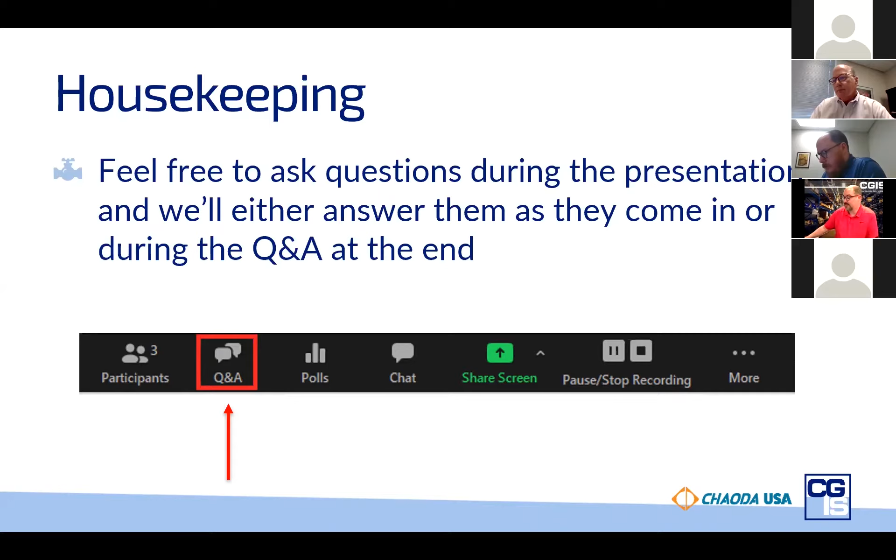So moving on to about CGIS. We trace our roots back to 1965. CGIS was officially founded in 1980 as we took over the ownership of a valve division from our sister company that was founded in 1965. And throughout the many years of our experience, we've developed various streamlines in our business to support our customer base throughout the world. Primarily based in Canada, but we have operations around the world.

We've developed engineered solutions primarily to focus on severe service, critical applications for every industry that runs process as their main part of their business. Streamlined solutions for day-to-day utility needs in the world of valves. Obviously project solutions and service to be able to support our partners, whether that's on the end user level or the manufacturing level.

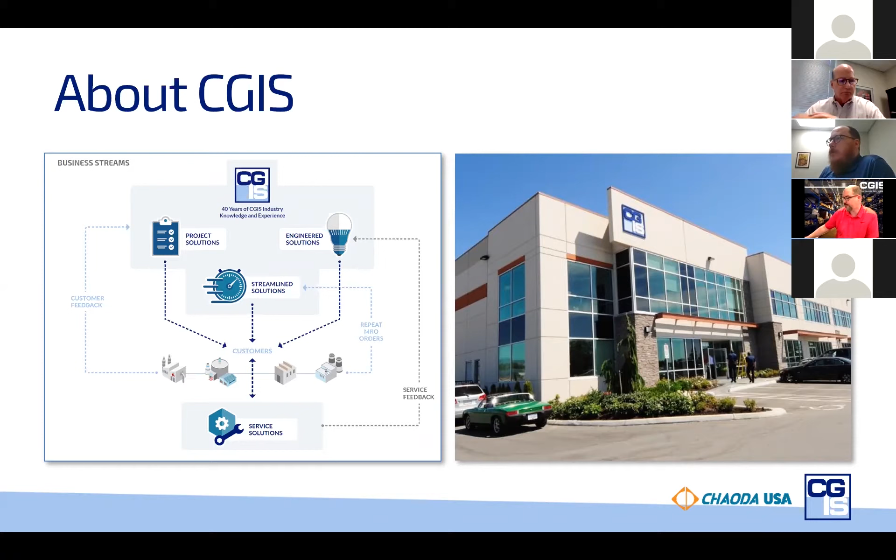Chaoda, privately held since 1984. They are focused on the infrastructure and technical development. They own the entire supply chain process right from the foundry to manufacturing, to boxing up and shipping it to our customers. 1.5 million square feet in manufacturing area. And of note, they have a complete North American team on quality control for the North American marketplace.

So our presenters today are Doug Jones, Richard Harmon, and myself, Kevin Niebergall. Doug Jones has 38 years of experience with a focus on severe service. He's the Vice President of Sales and Marketing with Chaoda USA and serves on API committees and task forces, including API 641 for fugitive emissions.

Richard Harmon is also based out of Houston, Texas. He's the Director of Marketing at Chaoda, and he has 10 plus years in the industry in various sales, marketing, product management roles. Myself, I have 26 plus years of experience in primarily Western Canada, focusing on oil and gas, pulp and paper, and LNG or cryogenic services in the oil and gas marketplace. I'm based in Prince George, BC, Canada.

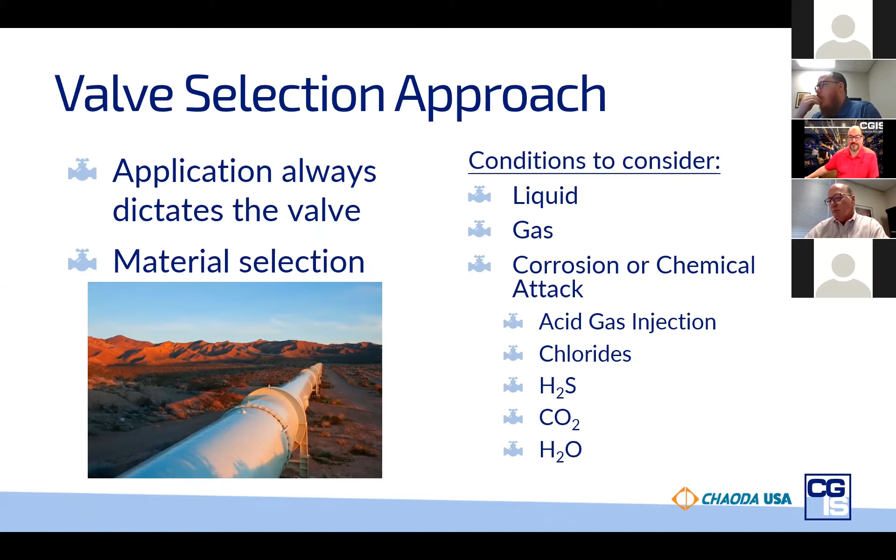So as part of my portion of the presentation, I'm going to talk about some of the applications that we'll commonly find in the oil and gas industry or in pipelines, to talk about some of the different designs or setups, and then allow Richard and Doug to dive into the technical differences in the types of valves. So commonly we'll find Trunnion mounted ball valves, or DBB and DIB, on line breaks to protect the piping system or the environment. It's monitoring the upstream, downstream pressure conditions, is a fully closed loop, self-contained system that will react based on the pressure conditions of the piping system in the event of a break or rupture of a piping system.

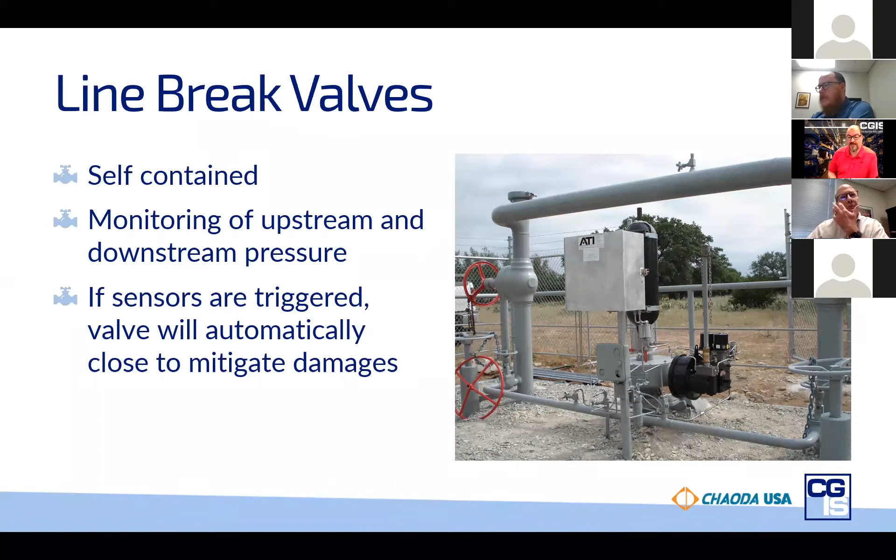So we have a mixture, normally we'll see mostly manual valves here. The automated valves are primarily part of the pipeline. So you can see that we have a manifold, receiving barrel that's connecting to the main line.

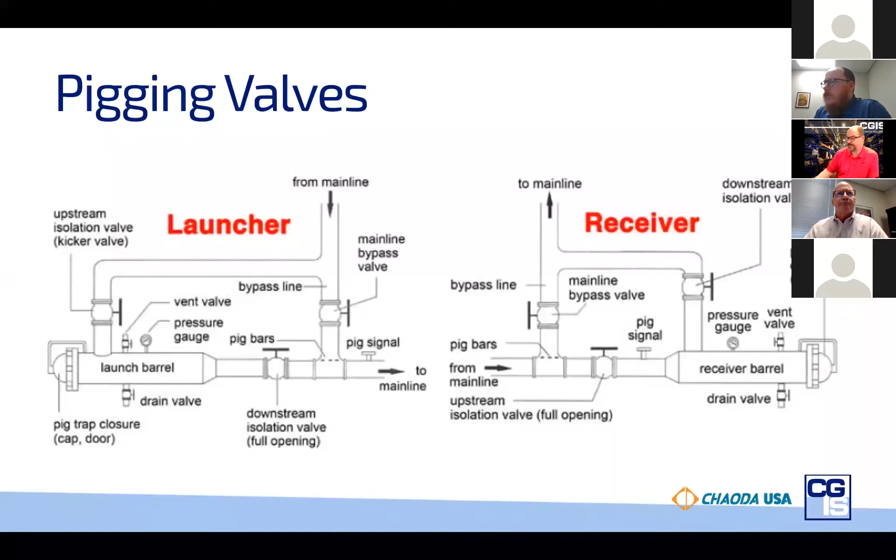So what's the purpose of pigging? Cleaning to remove any liquid or sediment or anything that has developed within the piping system that could potentially lead to corrosion or is affecting the volume of flow that's able to go through the pipeline.

The integrity has become extremely important over the last number of years. Introduction of smart pigs to measure wall thickness, identify any cracks, and corrosion issues that may be occurring within the piping system so that we can do a far better job of maintaining the safety of that pipeline.

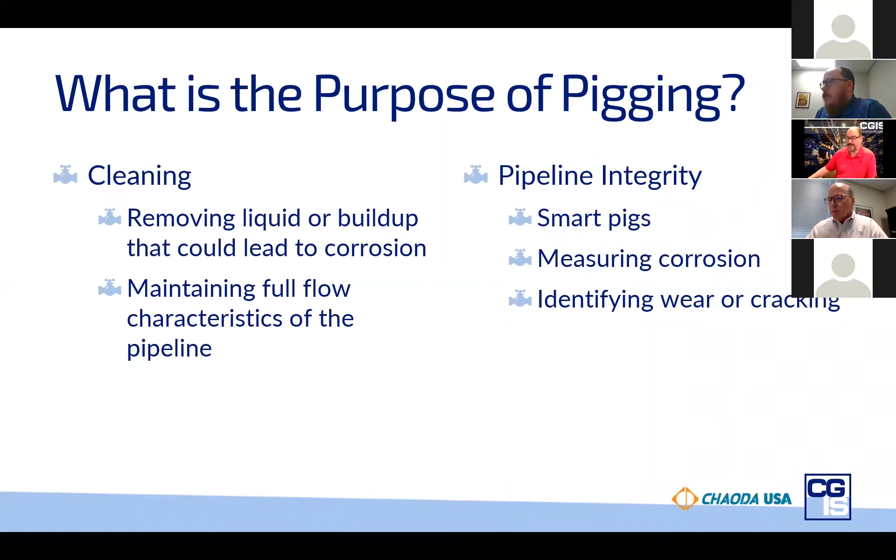Lines are running up from that valve so that we're able to inject sealants or lubricants to assist the valve in its performance. And then that is buried below ground so that we're below the freezing point so that we can safely operate.

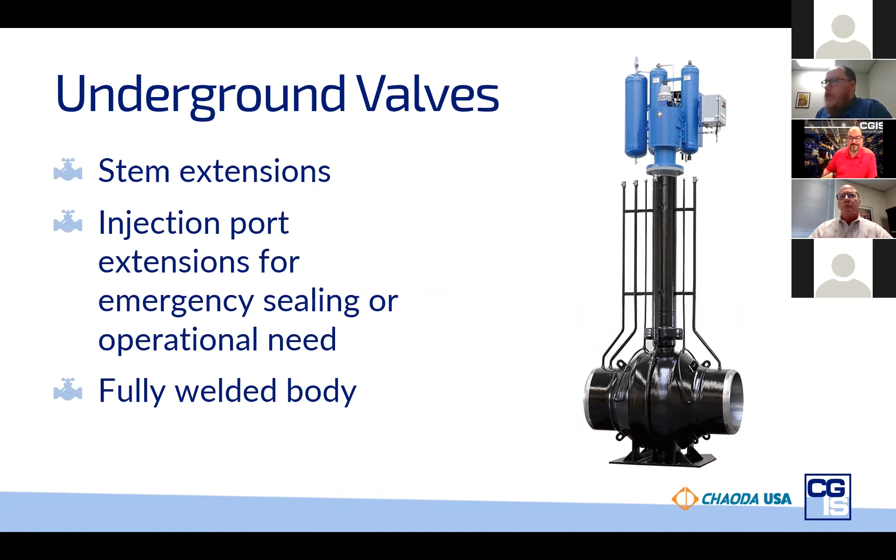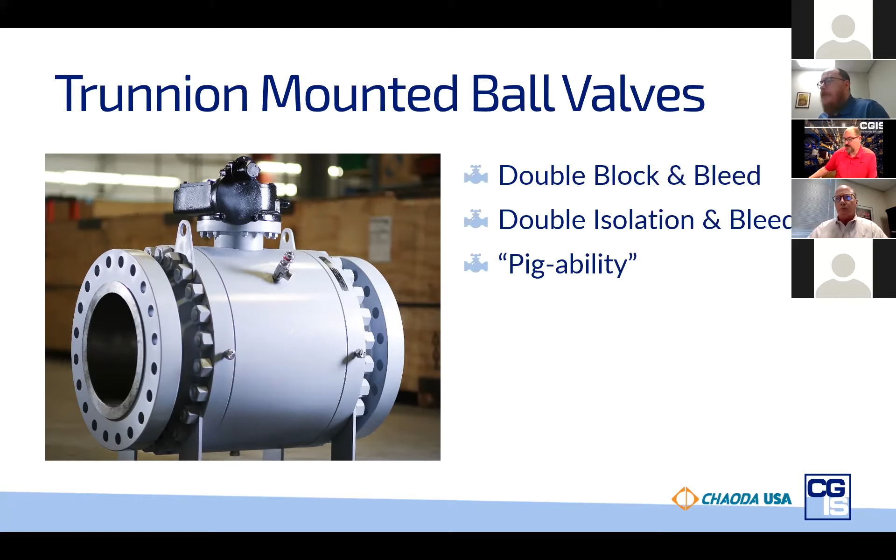Just from what Kevin introduced, I wanted to take a little bit of time and talk about pipeline isolation and how it interacts with valves. It's a topic that gets talked about a lot, and there is some confusion, not due to anybody's fault, but because there's a lot of competing and conflicting terminologies and philosophies about pipeline isolation. So I hope that we could run through some of these definitions, scenarios and design principles with respect to valves, so that everyone can have a better understanding of the different definitions, and then have an idea of what type of questions you need to ask to get a good understanding of how a valve performs in pipeline isolation. If we can accomplish that in this webinar, we'll be doing great.

With respect to pipeline isolation, obviously it's a critical facet of safety in pipeline work. For a pipeline that's been constructed and now needs to be maintained, being able to reliably and safely isolate sections of that pipeline so that you can work on them or clean them or do whatever you need to do with them—being able to do that safely is absolutely key.

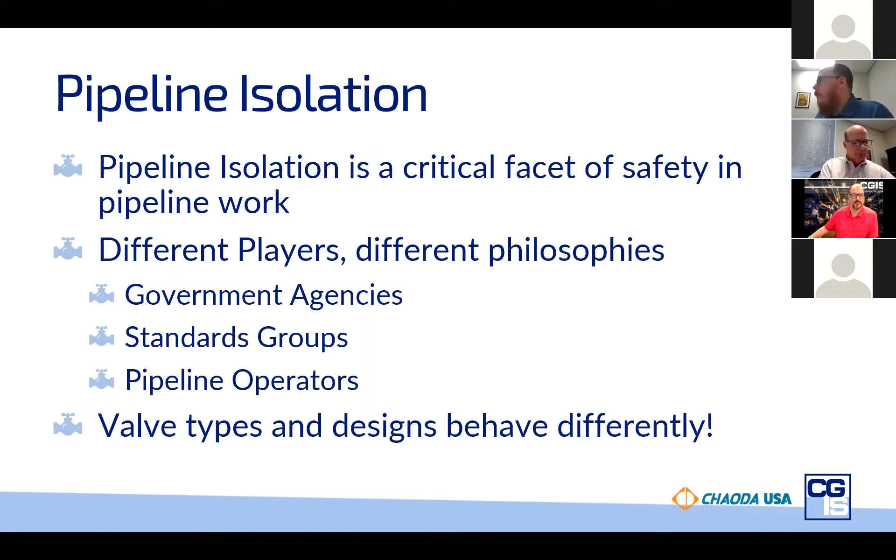If you're dealing with these companies and you don't know specifically what their isolation procedures are, it can be very helpful to just ask for that information, because in order to correctly specify valves for some of these pipeline operators, you really need to understand what their isolation philosophy is. So that's all you really need to take from this slide.

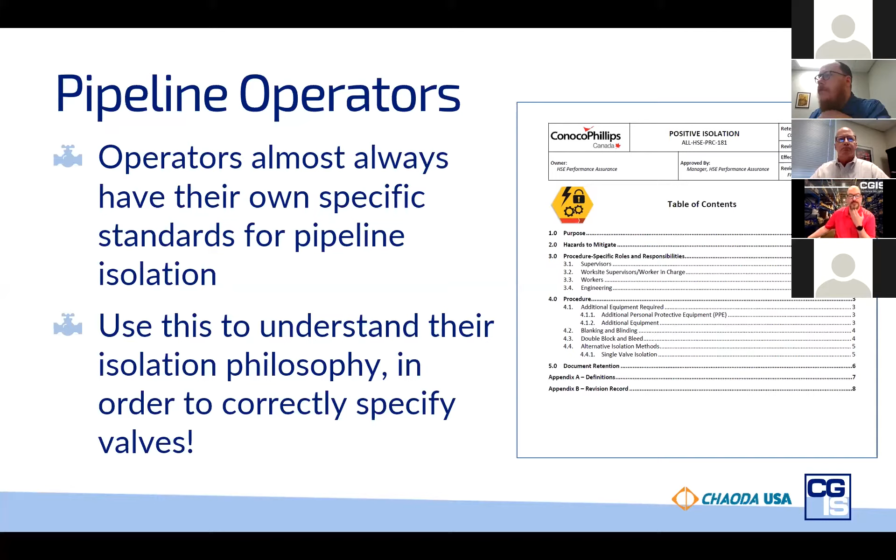With respect to government agencies, this varies by country. It's a little different in the US than in Canada, from what I can tell, and I'm certainly not an expert on Canadian law by any means. But from a general review, in Canada there isn't really an overarching or all-encompassing definition about valve isolation in pipelines, though there are safety regulations with respect to pipeline isolation that generally happen at the provincial level.

So it's important to be aware that these things can vary by province. I think, thankfully, a lot of pipeline operators, especially those operating nationwide, will make some reference to provincial regulation in their pipeline isolation standard. So the specification will say, in British Columbia you need to do this when isolating the pipeline—somebody needs to be there watching the bleed valve and making sure it doesn't expel media, for example. Something to be aware of, since things can change between provinces, and you want to be generally aware of that.

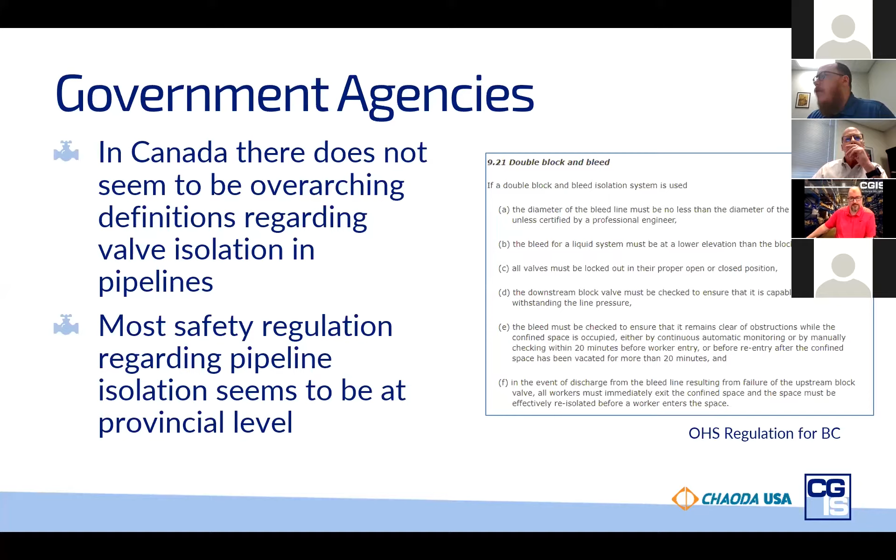Okay, and then the last group we talked about was the standards groups. The big one here with respect to pipelines is API, the American Petroleum Institute. They've put forward a specification that many people are familiar with—it's really integral to pipeline operations all over North America—and that's API 6D, which is a specification for valves for pipeline service.

In the last few revisions of API 6D, it's revised about every 5 years by a dedicated task group, and they've been putting forward clearer parameters about valve performance in various isolating operating scenarios. They've developed terminology that's more standardized, which I think gives everyone, if you understand it, a good basis for speaking a common language with respect to how valves function in different operating scenarios.

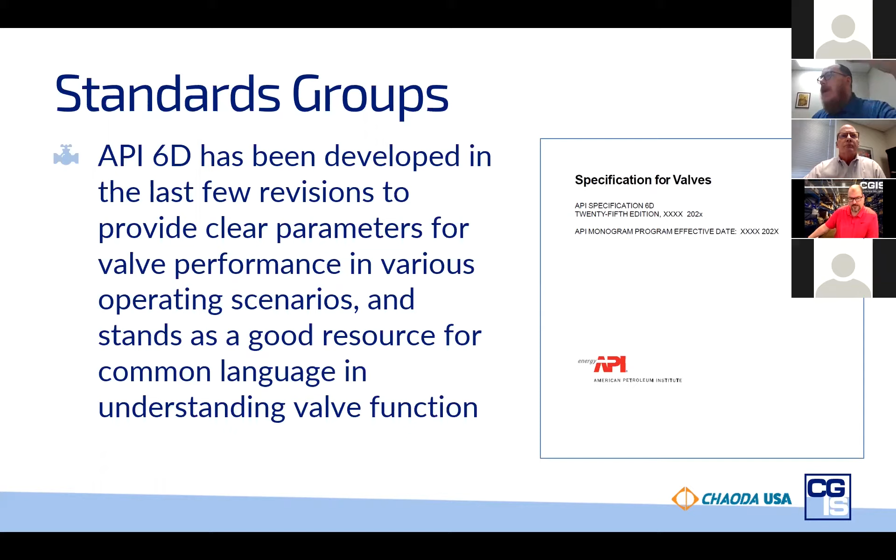So as we go through some of the technical details, I'm going to be pulling out definitions from API 6D and giving some explanation to those, so you can understand, at least from API's perspective, some of the common definitions and how they match up with valve function. So we'll go through that.

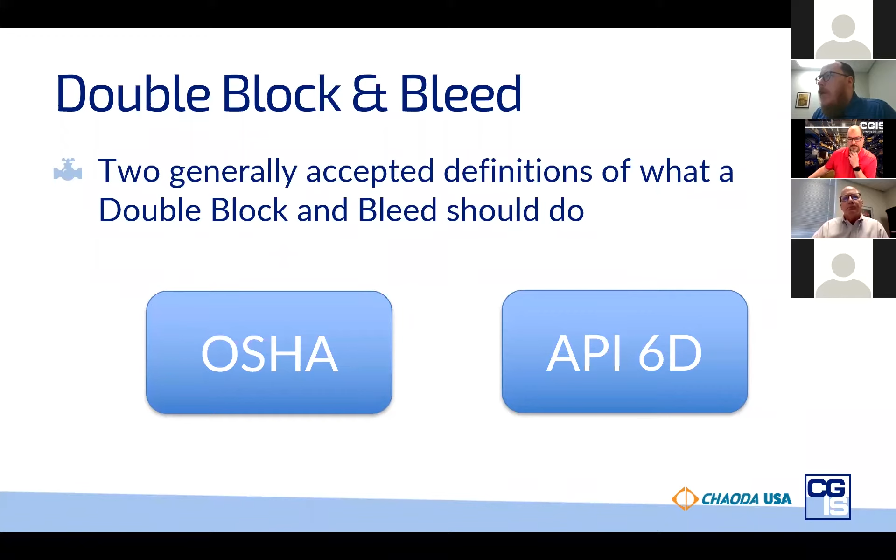Generally speaking, there are two generally accepted definitions. There's one put forward by American OSHA, and there's a definition of double block and bleed put forward by API 6D, the American Petroleum Institute. So we'll dig into those and understand what the difference is and why it matters.

Number two, close both of those valves. Number three, you open your drain valve. And so what does that do for you? It allows you to visually verify that the sealing integrity of that double block and bleed assembly is there.

So the idea of having two valves in line is, think of it like an insurance policy. You've got one valve on the upstream side that's the primary seal in that pipeline. It's performing the isolation in an ideal scenario, and you're able to verify that with your drain valve. If it starts to not seal anymore, you're going to start to see media coming out of that drain valve.

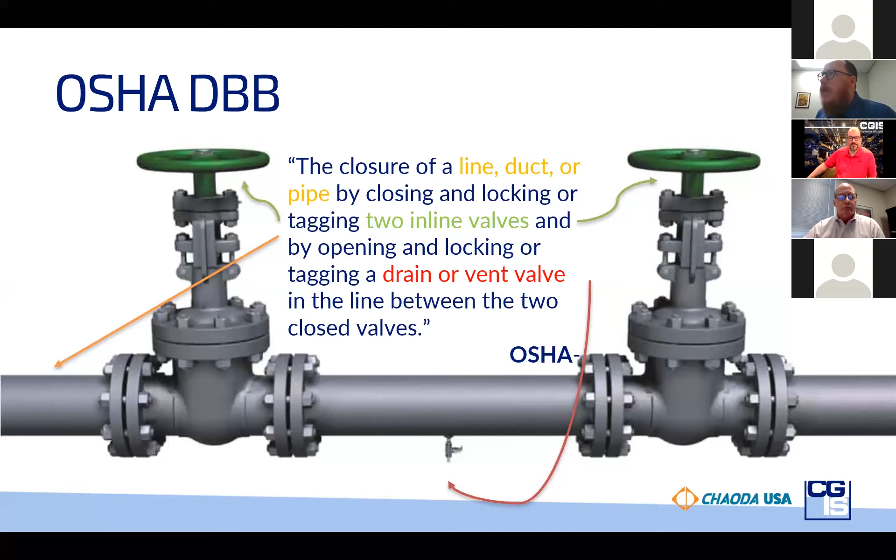And then you still have a second valve downstream of that spool piece that is still providing backup secondary isolation. So this is basically all about pipeline safety, and this is what OSHA defines as a double block and bleed assembly that you can put in a pipeline to assure you can isolate that downstream segment safely and have a means of verifying that you've done that. So that's OSHA.

Once you've applied that pressure against both sides, your valve should have a small drain valve, or it can be a vent valve, but usually it's a drain valve, attached to that valve that's connected to the body cavity. The body cavity should be isolated from the pressure you're applying on both sides, so that you can open that drain valve and visually verify the valve is sealing against pressure from both sides at the same time.

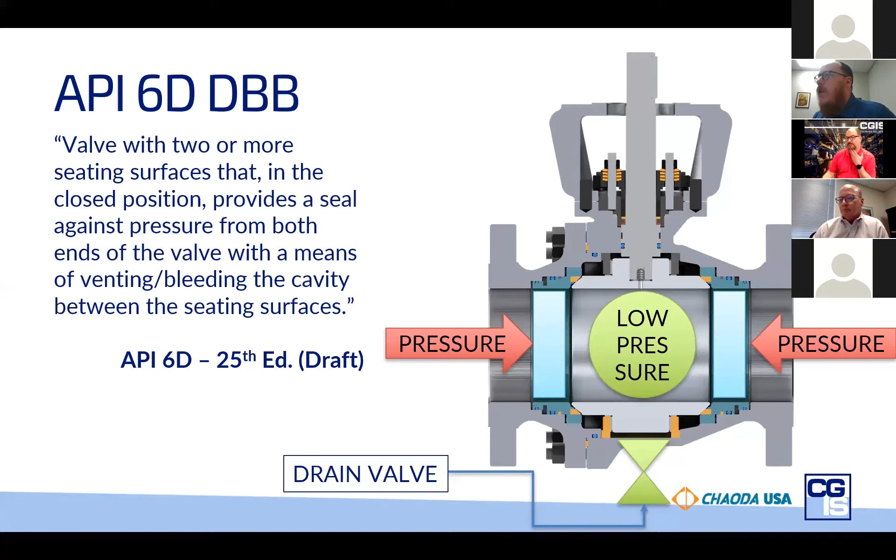So from double block and bleed, we've kind of talked about that. I think we kind of understand the key differences. From there, we're going to move into some a little bit more challenging definitions of pipeline isolation. And I want to start with really the valve design fundamentals.

If you want to understand how the concept or philosophy of double isolation and bleed works, you really need to understand a little bit about how a valve seat works and how valves can be configured to provide isolation. So we're going to talk about seat design terminology and ground ourselves in how a valve works, with a shared definition of that, so we can move forward to understanding how that valve with those seats works in a pipeline.

So we can cover three general definitions here. These are all definitions provided to us by API 6D, and the terminology is as well. These three are the key ones to understand if you want to understand pipeline isolation. So, three seat types or definitions.

The first one is what API 6D refers to as a unidirectional seat. I typically, in shorthand, call it a one-way seat. You'll also hear it referred to as a single piston effect seat sometimes. The core idea behind this is a seat that is designed to seal against a pressure source in one direction only. So that seat is set up so that if you're applying pressure from one side, you will get a positive isolation. And if it goes the other direction, you will not get a positive isolation. So that is a unidirectional or one-way seat.

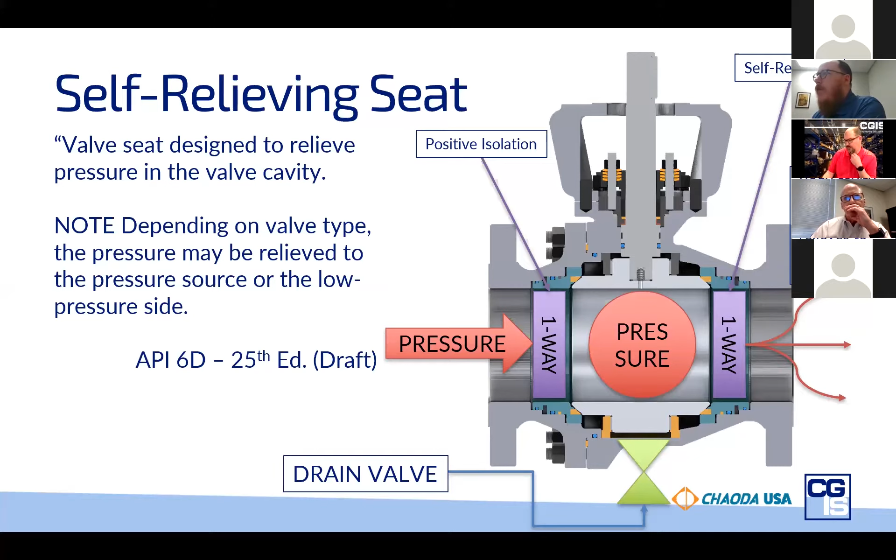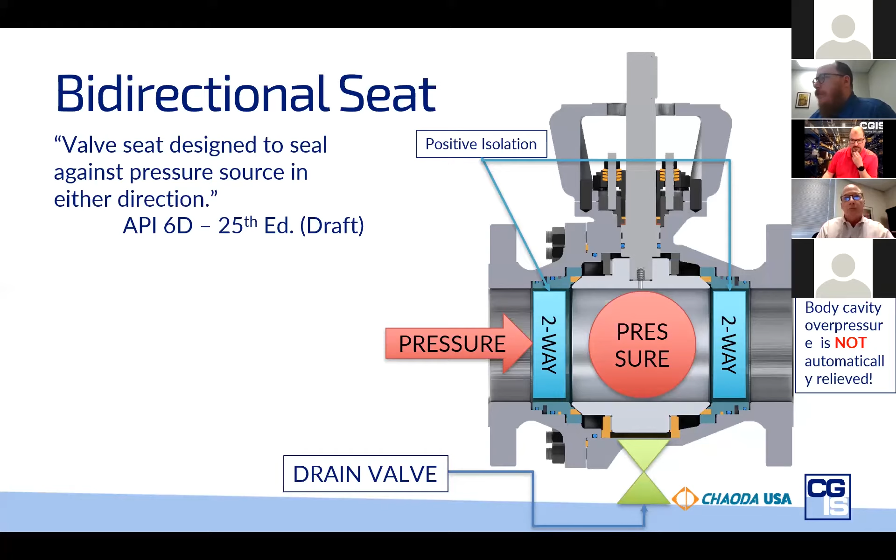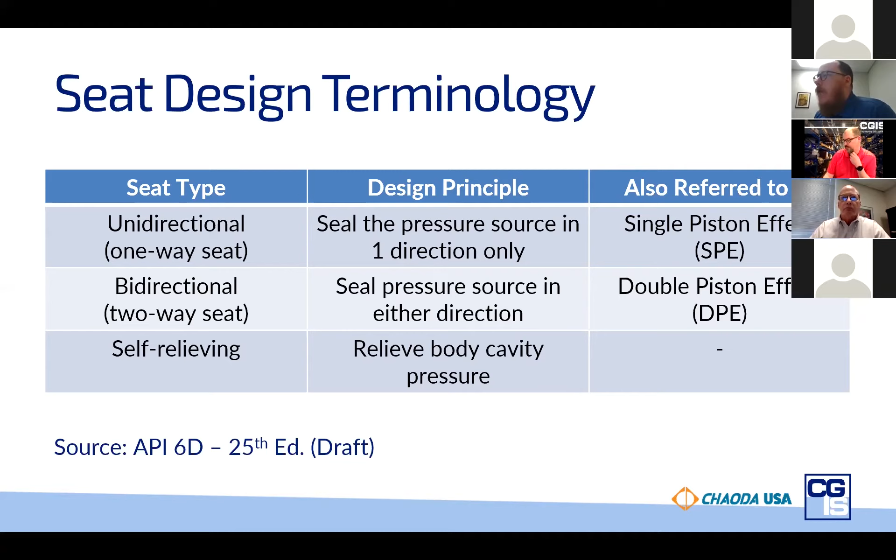So again, just to reiterate what we went through: a unidirectional one-way seat seals pressure sources in one direction. Bidirectional or two-way seats get the pressure source in either direction and seal it, isolate it. And then self-relieving, which most often for most ball valve manufacturers, their one-way seat is designed as a self-relieving seat. So those two terms are not interchangeable, but most of the time, most manufacturers, a one-way seat is a self-relieving seat. That's the terminology. I'm going to hit the next one.

Okay, so let's talk about API 6D and their definitions of different types of valve isolation. We're going to talk about double isolation and bleed. How is double isolation and bleed different than double block and bleed? The API 6D definition of double isolation and bleed, or DIB, is that a DIB valve is a valve with two or more seating surfaces, each of which, in the closed position, provides a seal against pressure from a single source, with a means of venting or bleeding the cavity between the surfaces.

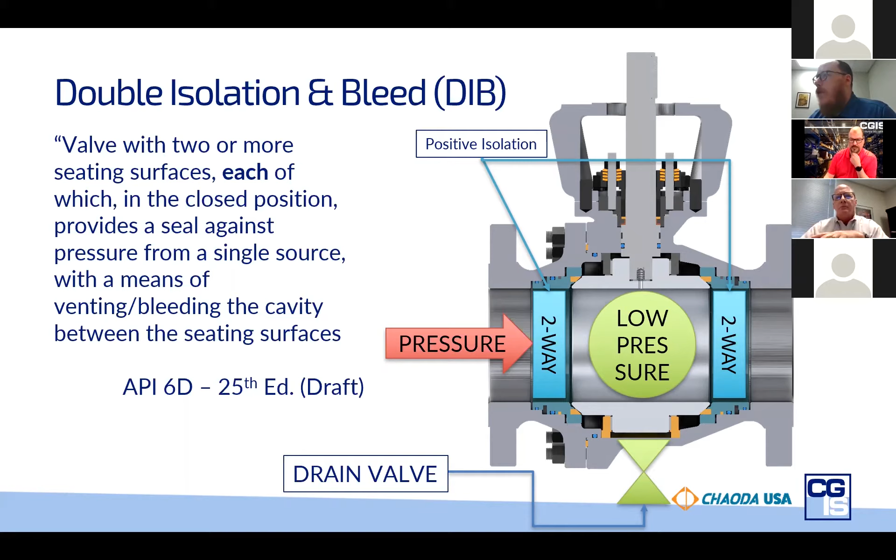So in the API 6D definition, for a double block and bleed, you just have to be able to seal when you apply pressure in both directions at the same time. Double isolation and bleed requires that those seats positively seal against a single source of pressure. When we were talking about a scenario of a valve installed with two-way seats, that valve would meet the requirements of double isolation and bleed. Why? Because if you apply pressure from one direction, you're going to get positive isolation on the upstream seat, and if anything were to ever happen to that upstream seat, you would still get positive isolation from the downstream seat.

In API 6D, they call out two different ways that you can achieve this. They refer to them as DIB1 and DIB2. DIB1 is with a trunnion ball valve. DIB1 is achieved by having two bidirectional seats, exactly like what we were talking about just on the last slide. You put two-way seats in there, they seal against pressure from either direction. You've got double positive isolation in either direction. It doesn't matter. So that's DIB1.

That is the most common specification for a double isolation and bleed valve: DIB1. They want two-way seats installed. Those two-way seats will isolate pressure in either direction. You have double positive isolation in one valve, and the only downside is that you need to figure out what to do with your body cavity overpressure. So that's the most common double isolation and bleed technology. There is another one in API 6D they refer to as DIB2.

DIB2 uses one two-way seat and one unidirectional, one-way seat. What that does is it allows you to achieve double positive isolation only in a certain installation direction. Let's think through this. The illustration we have here is a trunnion ball valve with one one-way seat and one two-way seat.

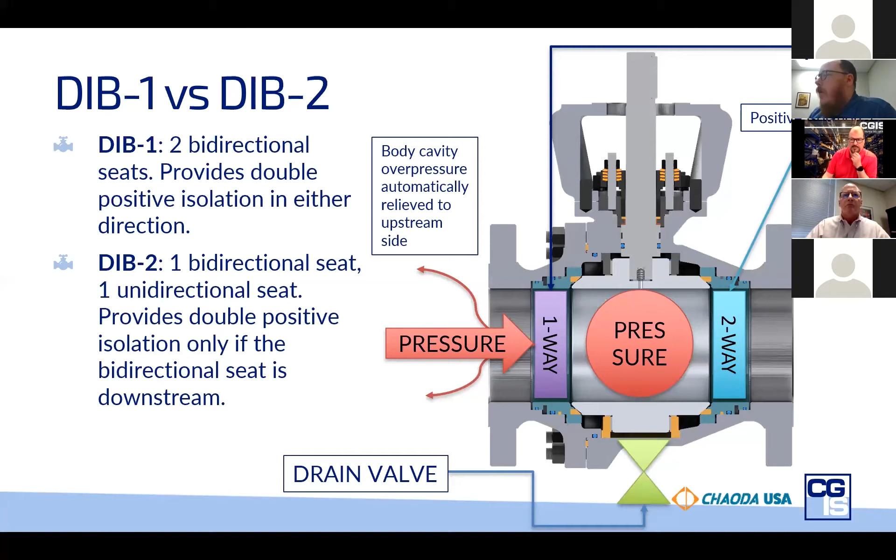The only downside to a DIB2 configuration is you need to have it installed with the pressure coming from one direction so that you can make sure the bidirectional seat is always downstream. Yeah, I think that's good on that slide.

We've gone through the seat design, the seat features or seat designs you can have, and the definitions of double block and bleed and double isolation and bleed, both DIB1 and DIB2. I wanted to provide a general overview because we really tried to provide illustrations from trunnion ball valve land. So I want to talk a bit more about different valve configurations and how they stack up with respect to their sealing technology and their ability to achieve either double block and bleed or a double isolation and bleed configuration.

If we go through what we talked about in order: your two valves with a bleeder in between, the OSHA configuration we discussed, is a pretty simple setup. It can be achieved with basically any valve. You could put two floating ball valves in line, two gate valves in line, or two globe valves in line with that bleed valve in between, and you'd be able to achieve both double block and bleed and double isolation and bleed with that configuration.

The only problem is it's two valves—it's a little bit more extra length than your trunnion ball valve or other types of pipeline valves that can achieve the same thing in a smaller footprint. So that's your two valves with a bleed in between. Your typical trunnion ball valve, which, like I said, most trunnion ball valves and most manufacturers' standard is a self-relieving seat configuration—their sealing is upstream sealing, it's pressure energized, and it's typically self-relieving.

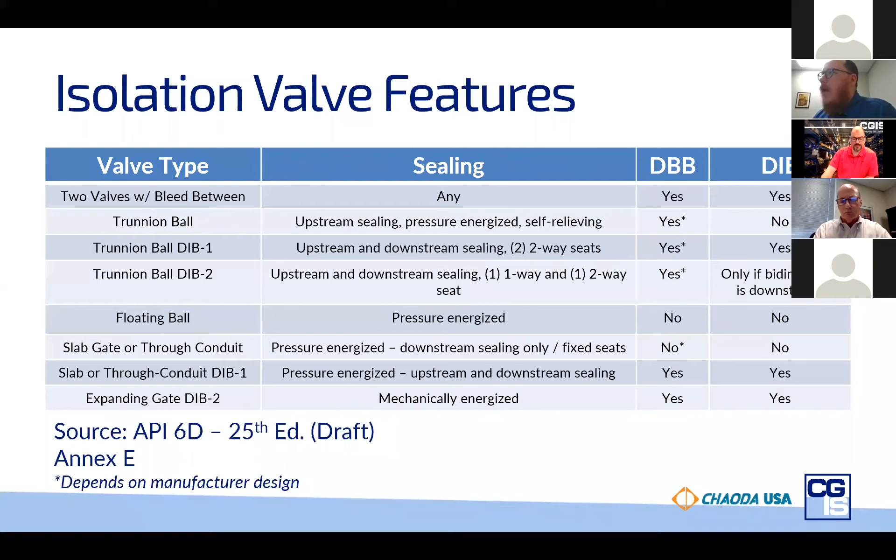So the key takeaways here, really high level, I hope this was helpful in helping people think through the issues involved in pipeline isolation. The important thing is not necessarily to have all this information memorized, but more so to know what type of questions to ask and what factors are in play.

One of the first things you want is to understand what you need your valve to do, to meet the regulatory requirement you're under. If you have a clear understanding of that, you can typically translate it into a clear API 6D approved definition, like whether you need a DIB1, a DIB2, or a double block and bleed, and get that clearly from the manufacturer.

The second piece is being clear on what terminology is being used. If you're hearing something about double block and bleed, as we talked about, there are competing definitions. So if somebody tells you about DBB, make sure you understand where they're coming from with respect to that definition—are they talking about an OSHA definition, or the API 6D definition?

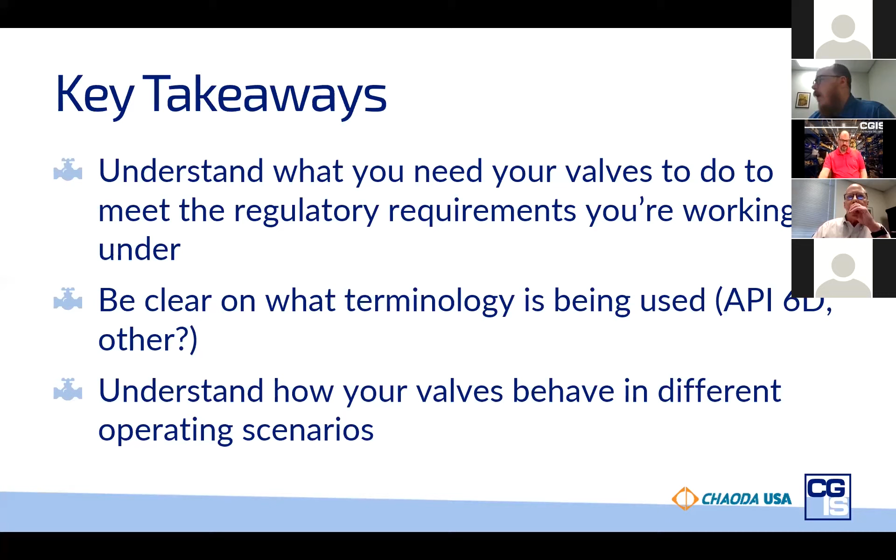So I think that's about all I got. Doug?

Thanks, Richard. I think it's certainly a pertinent topic to everybody here, and there have been some good questions. I tried to answer a few, there's a few left open, so as we go through, if we can handle some, we can leave the others to the end. So what Richard just talked about was a lot about pipeline safety.

We're going to transition a little bit, since this is a safety webinar, into something more related to personnel safety. This is about the various methods of pigging operations within a pipeline, and really to talk about some alternatives to the traditional pig launching and pig receiving operations that have been historically associated with pipelines.

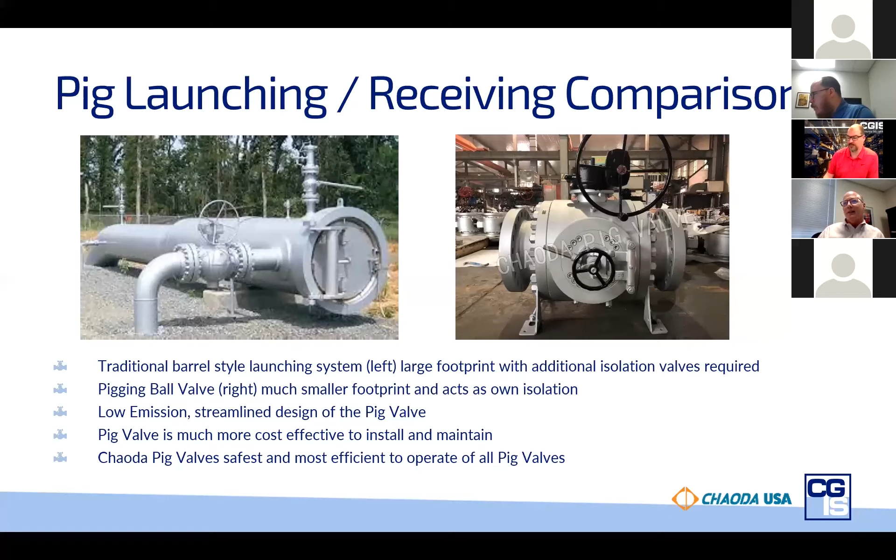And we believe as we go through this that we've done exactly that. Can we go ahead? I know we're running short on time, so I'll be brief as possible.

This is just a quick video on how a pigging operation looks when using a pigging ball valve, as opposed to the barrel style launcher.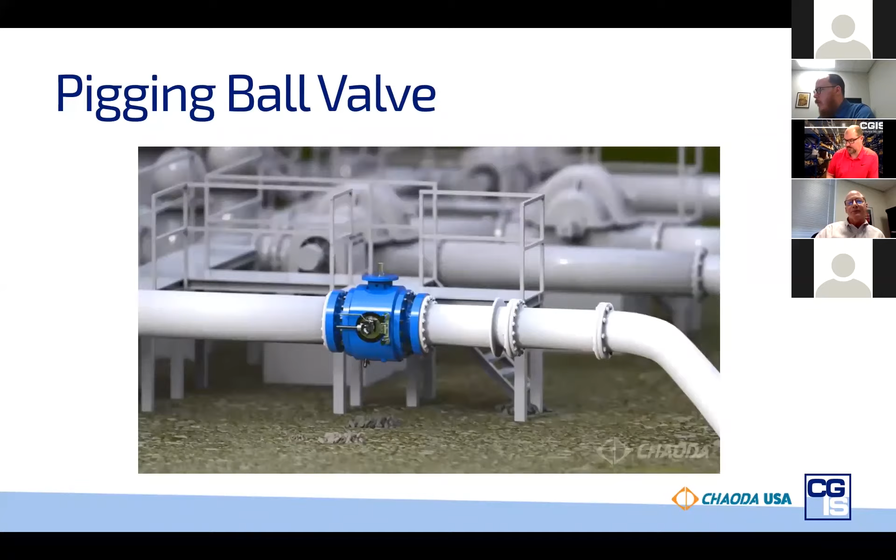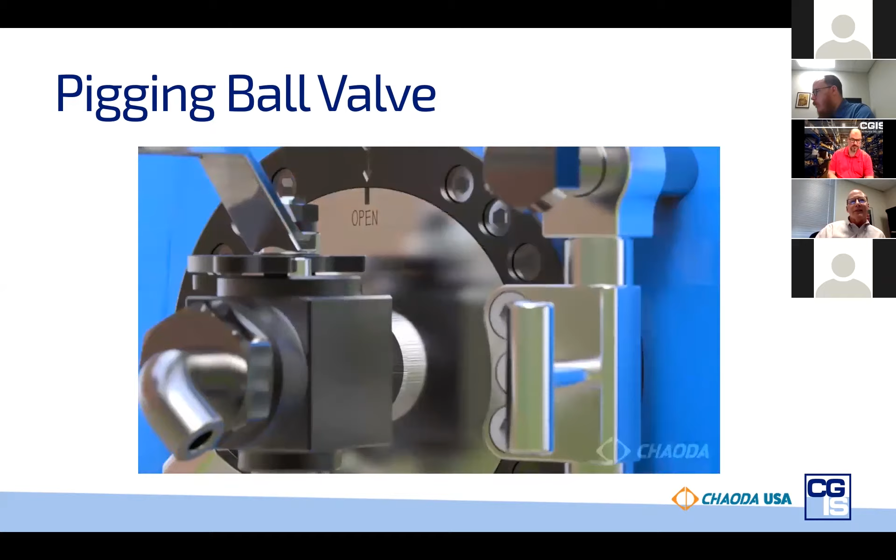So there's the valve. I'll explain the actual features of this. The valve is now isolated. We're bleeding, in this case, a liquid out of the bottom of the valve. There's a secondary safety valve to bleed whatever may be left. Closure opens, pig goes in. Closure is closed.

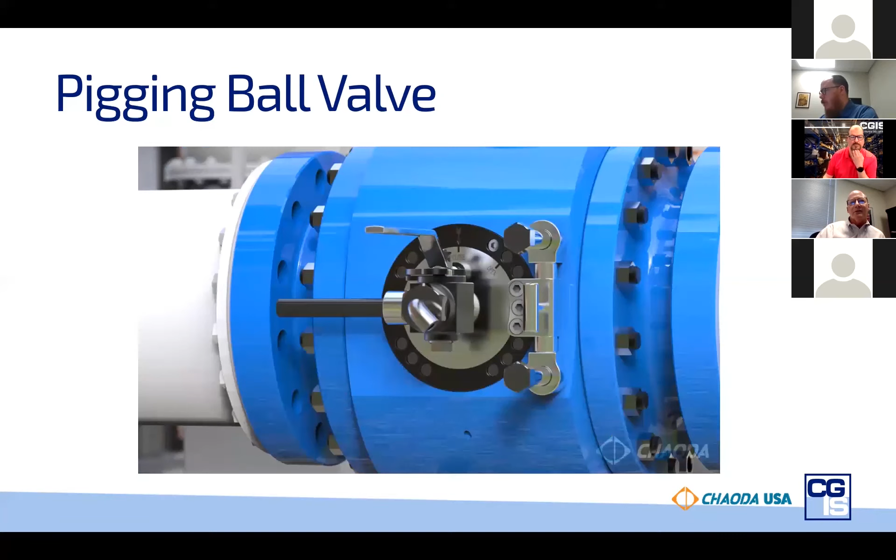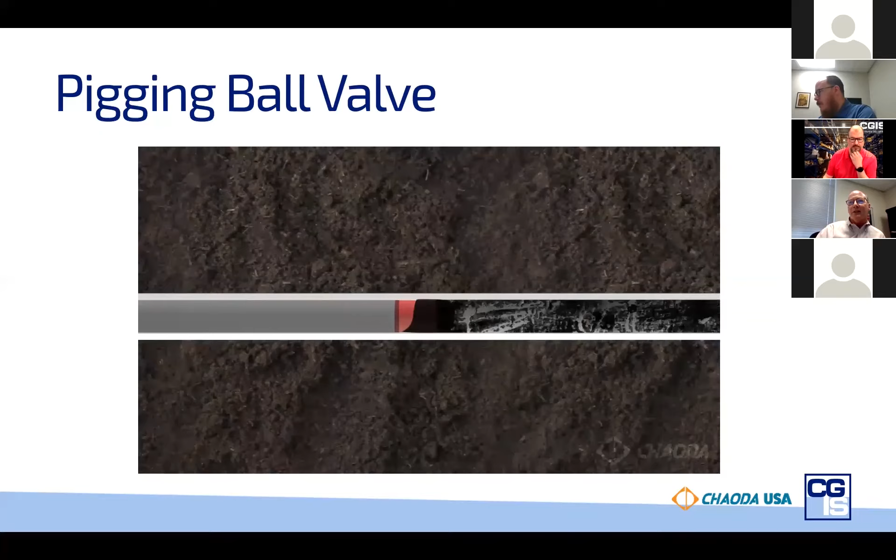Valve is cycled. Pig goes down through the pipeline, very dirty pipeline. We know nobody on this call has a pipeline that dirty.

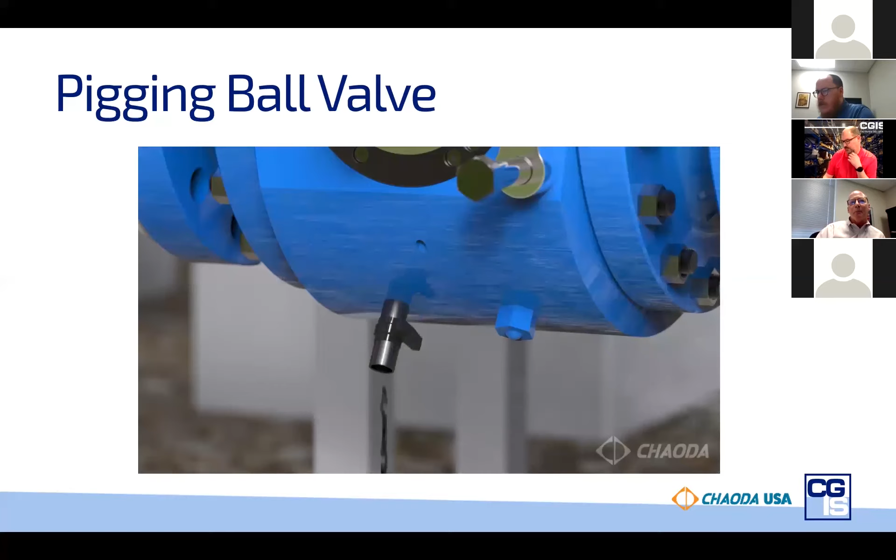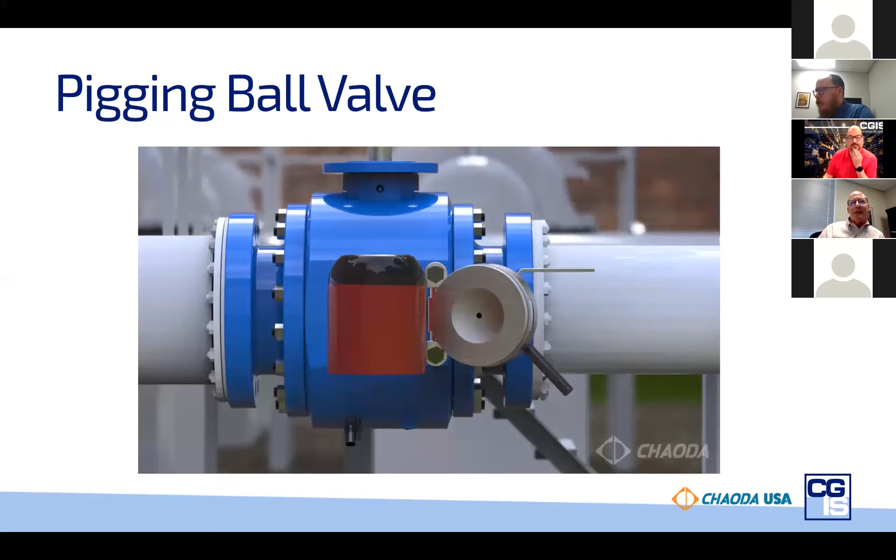Catches on the other side. There's a counter valve on the other side that will catch the pig. Same bleed operation happens. Same secondary bleed operation happens, which I'll also explain. Closure's open, swung open, pig comes out, and your pigging operation is complete.

So that's what happens with a pig ball valve, as opposed to having to isolate with a different valve, open the barrel, load the pig, release the isolation valve, and then have the pig go down.

So it's certainly more efficient from an operations standpoint, in that the number of people required to do that is significantly less, right?

So what we've done that's a little bit different - a lot of the traditional pigging ball valves that have been in the market for the last few years have utilized a top entry design where the actual closure is on the top of the valve. It has a threaded closure so that you have to climb on top of the valve, undo the closure, do something with it. Either it's mounted on a davit or it comes clean from the valve, and then you have to put the pig in, thread the closure back, and then go from there.

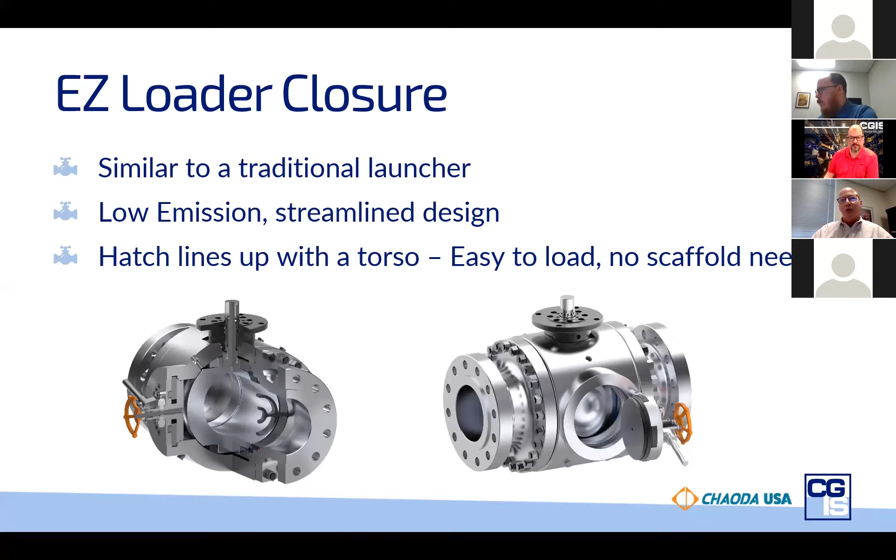What Chaoda's done a little bit differently is that we've moved the closure to the side of the valve so that it lines up at torso level, right? So it's a little bit easier access, and we believe that helps reduce the number of operators required to do the pigging operation itself.

Another advantage of the style of closure we've designed is there are no threads. It's not a threaded closure, so it's not susceptible to environmental conditions that may lead to thread corrosion, thread galling, anything like that. So it's more of a traditional style closure.

There are guides for the closure so that when it swings out, the closure never leaves the valve. And the actual operation, as opposed to a threaded multiple-turn to get the closure open, we just have a quarter-turn style operator that breaks the locking tabs free so the closure can release, somewhat like a bank vault, right? Like an airplane door, a jet door - you just crank it a quarter turn and then pull it out.

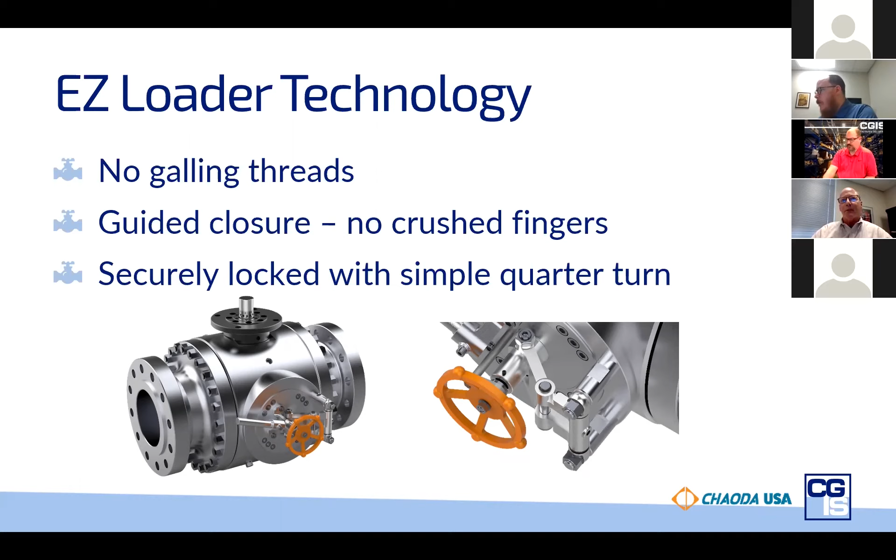The closure itself runs on guides. It's also a double hinge style, right? So you pull it out and then it hinges on the double hinge, very lightweight. Swings free of the opening itself, and again stays put, never goes anywhere. It's the safest from a pinch point perspective, we think, the safest closure out there, because the closure never leaves the actual valve itself - it stays attached together with the style and the weight of the closure.

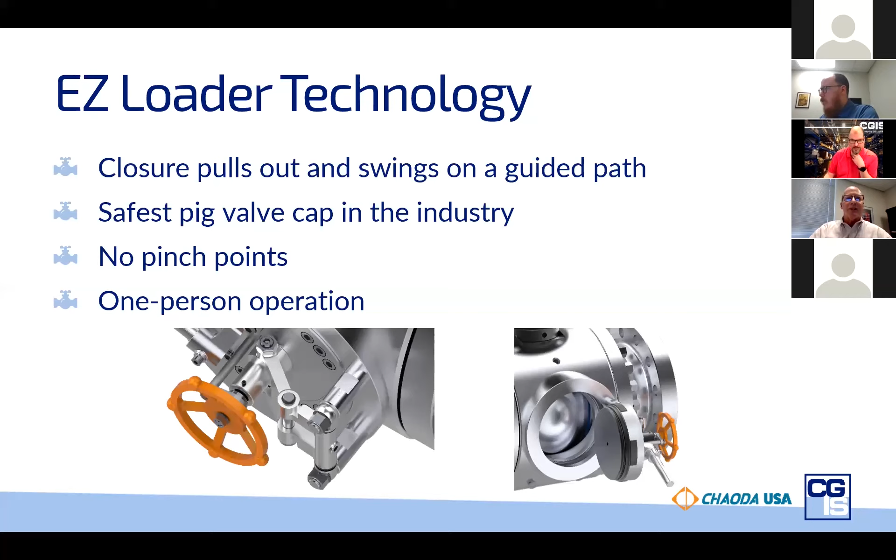It reduces the amount of operators required to do this, so it could be as few as a one-man operation, certainly no more than a two-man operation.

The next thing we've really focused on is the safety aspect. There is the normal cavity bleed that happens when you isolate the valve. But in the event that there is some obstruction, some cavity pressure, or even gravity that keeps the body cavity from venting all the way, we have a secondary relief valve system that ensures the body cavity is completely relieved, via this needle globe style valve on the face of the closure itself. You saw it in the video, right?

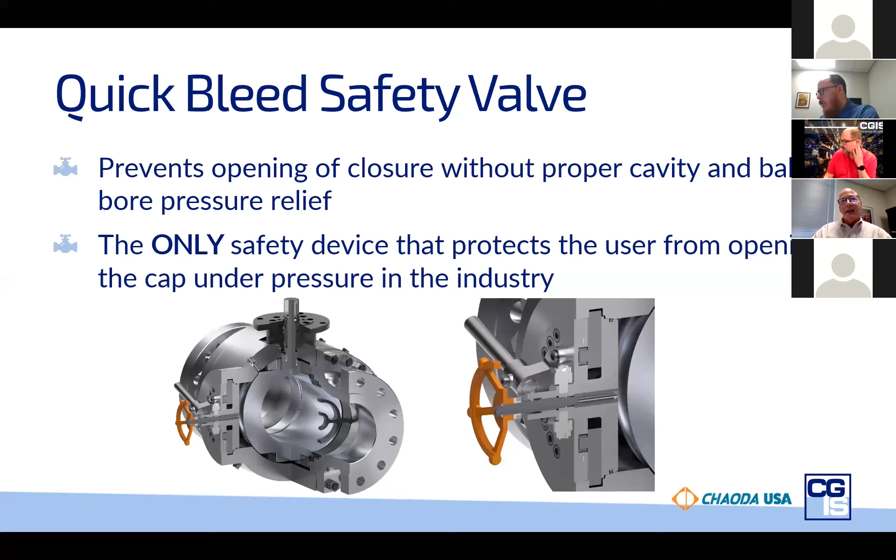In the video, you saw a quarter turn valve, where you bleed the bottom, the cavity, or the side of the valve, depending on whether you're running gas or liquids, and then you do this secondary relief before you can open or close the valve. And it is a safety device, because I'll show you in the next slide.

You cannot open the closure unless this particular safety valve has been released. This safety valve and the closure are designed so that there's a mechanical pin attached to the secondary relief valve, the bleed valve, mechanically located next to the locking tabs on the closure lever itself, so that it is impossible to unlock the closure unless that relief valve is open. That's a safety feature we've put in there to make sure there's no chance that somebody can open up the cavity of this ball valve with pressure still left in there.

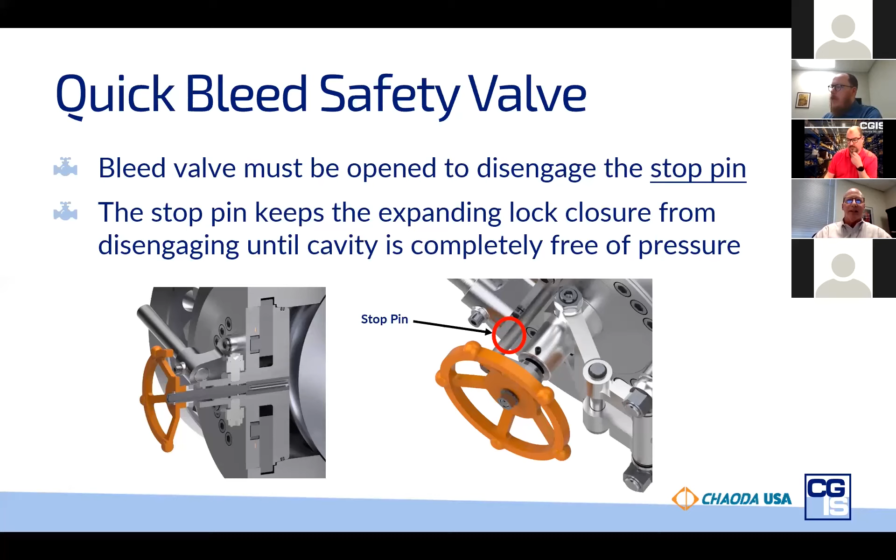To us, that's a significant safety advancement over some of the traditional pig valves on the market, where there are no auxiliary or secondary relieving systems in play or available.

One of the other ways we've tried to make this valve more efficient is the catcher plate option. Our catcher plate, unlike many of the other valves, is integral to the seat ring. One of the advantages of that is it minimizes parts within the valve itself, and it also makes reversal easy.

If you have a valve in inventory, or let's say a customer has a valve in inventory that's set up as a launcher, with the catcher plate on the upstream side so the pig can be inserted and the line pressure will shoot the pig downstream, and it needs to be installed as a receiver instead, with the catcher plate on the downstream side so it will stop the pig when it's coming down the pipeline...

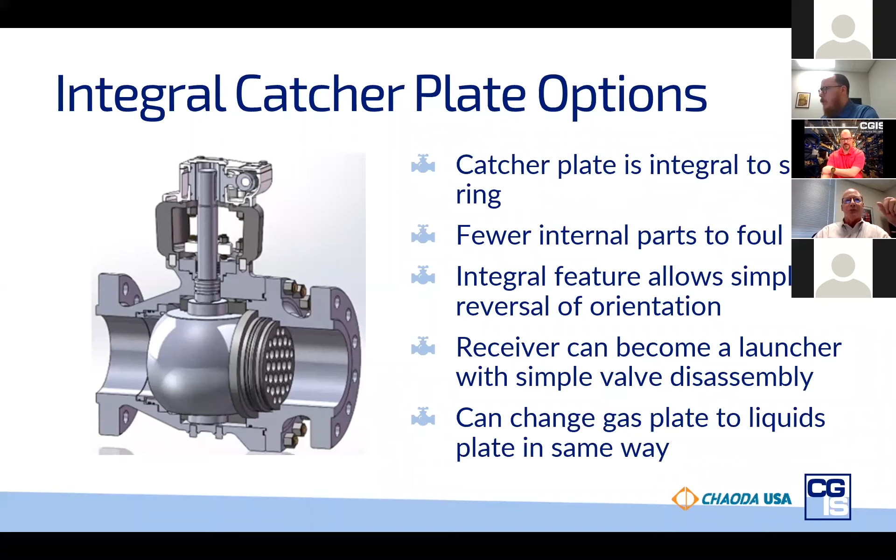You can do that as easily as disassembling the valve and reversing the seats that are integral with the catcher plate. So the seat rings are the same upstream and downstream, whether they have a catcher plate in them or not. The catcher plate is oriented in such a way that it does not impede the sealing or alter the geometry of the seat ring itself. So very reversible and transferable.

We also offer two different styles of catcher plate. The traditional style for natural gas service is the drilled plate you see on the left. That's perfectly fine for clean natural gas where there's no sediment, no impediments, nothing to get caught up in the catcher plate itself or impede the flow.

In a lot of cases where there are liquids, or in our particular market down here where these things are used a lot in oil service, there are paraffins and sediment within the oil itself that can severely restrict the flow through the traditional gas style plate. So we've developed a liquids plate that has broader, wider flow openings and will allow sediment, liquids, paraffins, and other things that can obstruct the flow to pass on through the catcher plate itself.

As far as interchangeability goes, if there's a valve in stock, for example, with a gas catcher plate, and you decide you want a liquids plate, that can just as easily be changed out. Just disassemble the valve, take the gas plate with the seat ring out, put the liquids plate with the seat ring in. Easy enough to change.

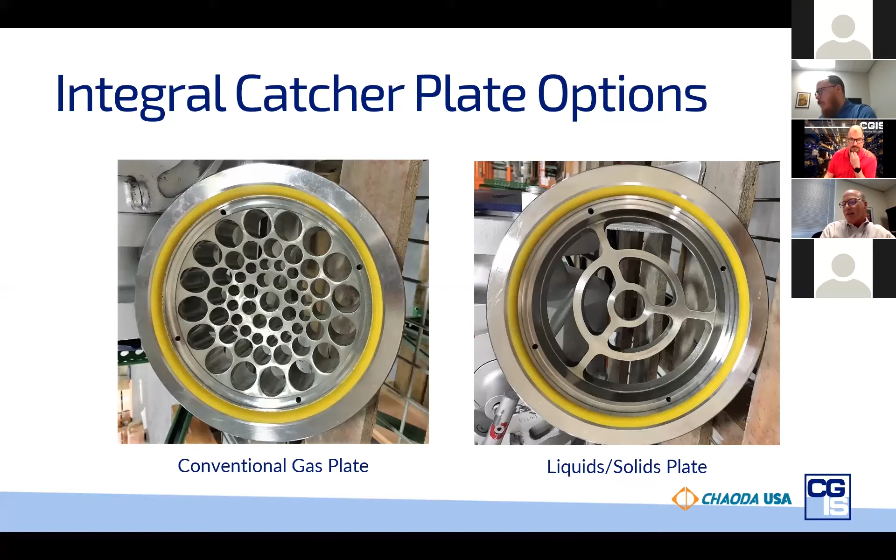In summary, I told you this would be quick. Chaoda happens to manufacture this valve up through 20-inch in size, ASME classes 150 through 900, flanged. We can also do this configuration in metal seated as well, right—Chaoda has significant metal seated capabilities, and a big part of our ball valve product line is metal seated. These are forged three-piece bodies, just like our Trunnion ball valve platform. Easy to access and operate, with the EZ Loader closure, and the high flow solids resistant plate. We have API 6D license, and we have our CRN numbers for Canada.

So that's a brief overview of the pigging ball valve, the differences, where you might select it, where you might use it, and also some of the features that are all about personnel safety and ease of operation.